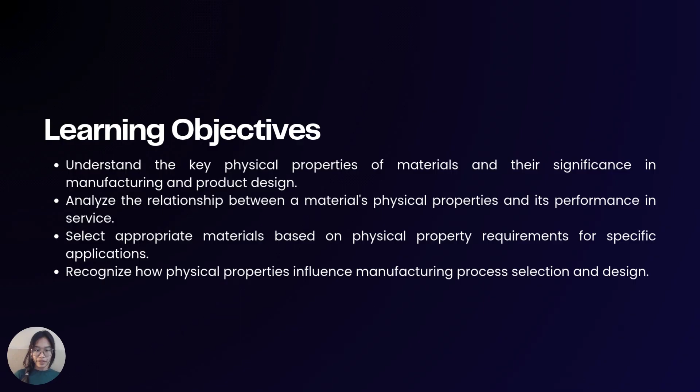To put it simply, mechanical properties answer the question, can it withstand the load? Physical properties answer questions like, will it melt in service? Will it conduct heat away or act as an insulator? Will it expand and jam the mechanism when the temperature changes, or will it rust?

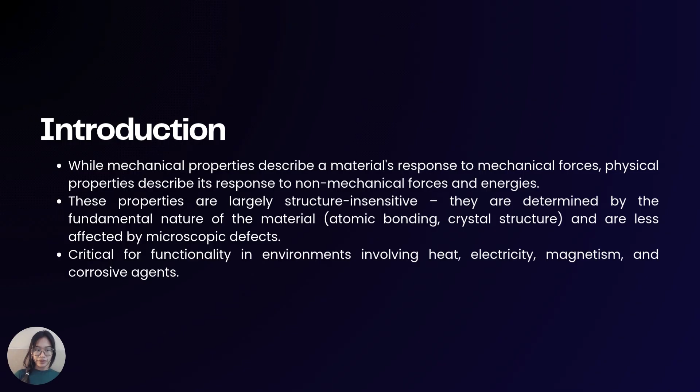A key distinction here is that these properties are largely structure insensitive. This means that while a scratch or a small void can significantly reduce your tensile strength, it has a much smaller effect on properties like melting point or density. These are governed by the fundamental atomic bonds and the crystal structure itself.

Density is one of the most intuitive properties, mass per unit volume. But its implications are profound. It's not just about how heavy something feels, it's a key driver in the lightweighting of structures. In aerospace and automotive engineering, the goal is often to maximize strength and stiffness while minimizing the weight. This is where we use the metrics strength-to-weight ratio and stiffness-to-weight ratio.

A material like aluminum with a density 1/3 that of steel can be a superior choice if it provides sufficient strength for the application, leading to massive fuel savings. Specific gravity is a convenient dimensionless number that allows for a quick comparison against a universal reference, water.

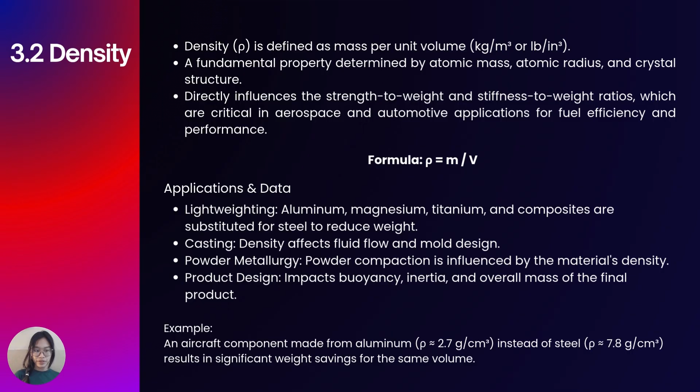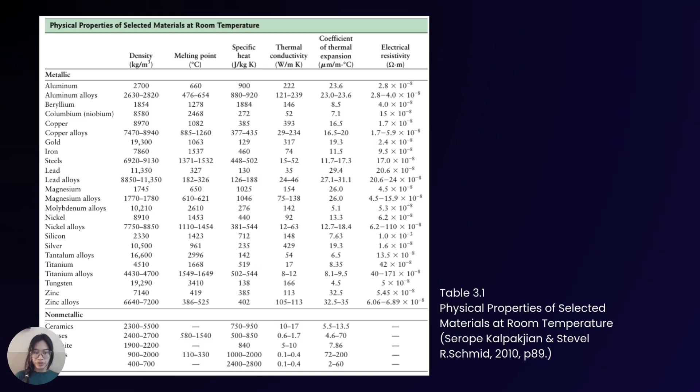And for a consumer product, density directly defines its heft and perceived quality. Think of a premium pen versus a disposable one. The classic example is the substitution of steel with aluminum, composites, or even magnesium in everything from aircraft fuselages to laptop cases.

The melting point is a direct window into the atomic structure. A high melting point indicates very strong atomic bonds, ionic or covalent bonds that require a tremendous amount of energy to break. This is why ceramics like tungsten carbide have such a high melting point. For manufacturing, this is a primary process selector. You cannot cast iron with a wooden mold, and you cannot weld plastics with a low temperature solder.

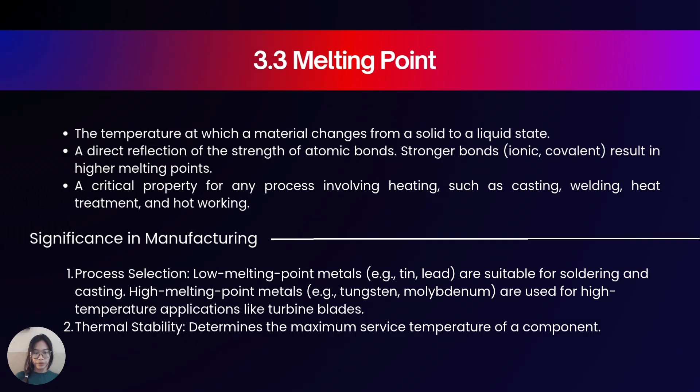The melting point sets the rules of the game for all processes involving liquid metals: casting, welding, and soldering. It also defines the upper service temperature limit for a component. Get too close to the melting point and the material will rapidly lose strength through creep. The melting point gives us a direct look into the atomic heart of a material.

It's the temperature where the thermal energy is so high that it overcomes the forces holding the atoms in their orderly solid form. Think of it this way. Materials with strong covalent or ionic bonds, like the carbon-carbon bonds in diamond, or the aluminum-oxygen bonds in alumina, require a tremendous amount of energy to break. This results in very high melting points.

Materials with metallic bonds or polymers with weak van der Waals forces between their long chains have much lower melting points. These aren't just a number in the textbook. In manufacturing, the melting point is a gatekeeper. It tells you if you can cast a metal, what kind of furnace you need, and what temperature you must reach to weld. In service, it sets an absolute upper limit.

If you try to use a steel turbine blade too close to its melting point, it will soften and fail catastrophically due to creep. The melting point defines the thermal operating window for every material.

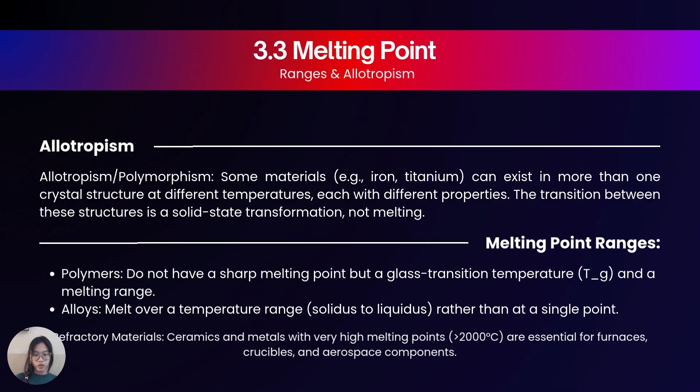Specific heat is the material's thermal inertia. Think of it as the thermal mass. A material with a high specific heat, like water, can absorb a lot of heat energy without its temperature rising very much. This is why water is used in cooling systems.

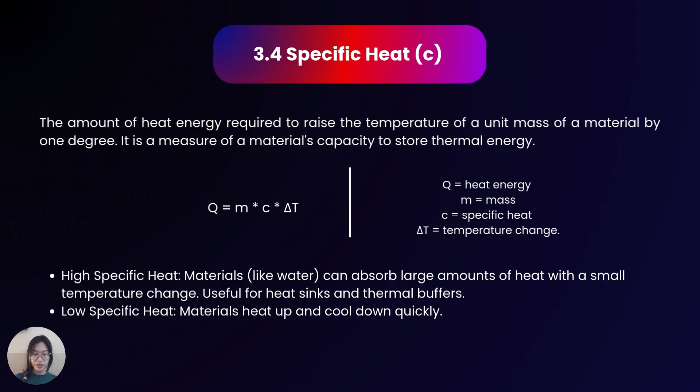The formula, heat energy equals mass times specific heat times temperature change, tells us that the energy required to heat something up is directly proportional to its specific heat. This is a key consideration for energy costs in manufacturing. If you need to heat a large vat of a high specific heat material, it will take a lot more energy and time than a material with a low specific heat.

In casting, the specific heat of the molten metal determines how much heat must be removed for it to solidify. A high specific heat means it will solidify more slowly. In heat treatment, it controls the heating and cooling rates.

In machining, about 98% of the energy used in cutting is converted to heat. The specific heat of the workpiece and the chip determines how much of that heat is carried away with the chip, which is a primary mechanism for cooling the cutting tool. If the heat isn't carried away, it leads to rapid tool wear.

Furthermore, components like brake discs or turbine blades undergo thermal fatigue. Their specific heat influences how much energy is stored in each heating cycle, contributing to stress and potential failure.

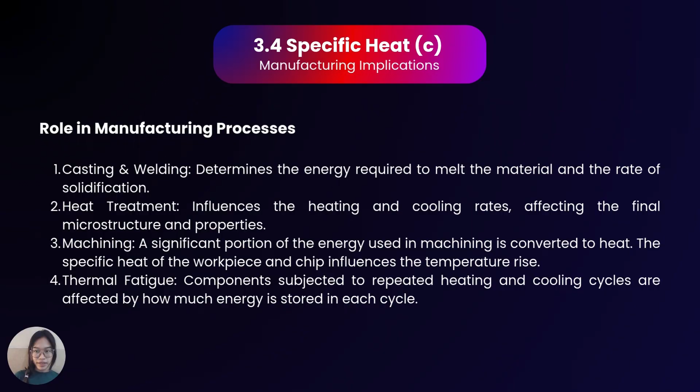Thermal conductivity, K, is all about the rate of heat transfer. It's not about how much energy can be stored, but how quickly that energy can be moved. Metals are good conductors because of their electron cloud, which transports energy rapidly. Insulators like plastics and ceramics lack these free electrons and rely on slow atomic vibration.

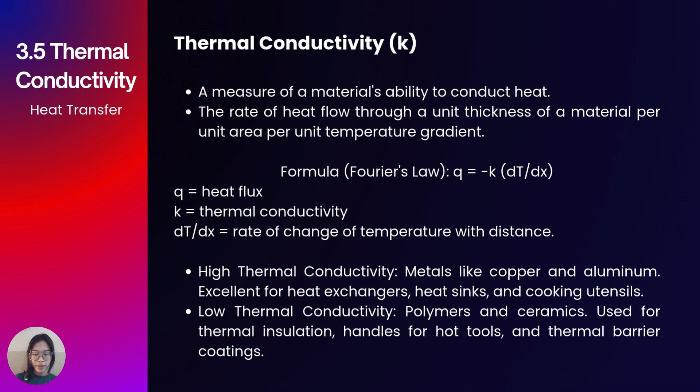The negative sign in Fourier's law is a simple convention to ensure that heat flux, Q, is a positive number, since heat flows from high to low temperature, making the gradient dT/dx negative.

Now, this is where the rubber meets the road. You might think high conductivity is good or low conductivity is bad, but in manufacturing, it's never that simple. Thermal conductivity is a double-edged sword, and whether it's an asset or a liability depends entirely on the process you're using. Let's break it down in 3 areas.

First, let's talk about machining. In this process, you have a cutting tool trying to shear off a tiny piece of metal, and this generates an immense amount of heat concentrated on the very edge of your tool. If that heat isn't removed, the tool softens, wears out, and fails fast.

Scenario A, you're machining aluminum, which is a great conductor. This is a good situation. The heat generated at the cutting tip doesn't just stay there. It does 2 things. It gets carried away by the chip, which acts like a tiny disposable heat sink, and it gets conducted back into the main body of the workpiece. This natural heat dissipation keeps the tool's cutting edge relatively cool, allowing it to last for a long time.

Scenario B, you're machining titanium, a poor conductor. This is a challenge. Titanium acts like a thermal barrier. The heat from cutting can't escape into the workpiece. It gets trapped right at the tool-workpiece interface. This creates a tiny, incredibly hot zone that literally cooks the cutting tool, leading to rapid wear and failure. This is why machining titanium requires special strategies, like high-pressure coolant to force heat out.

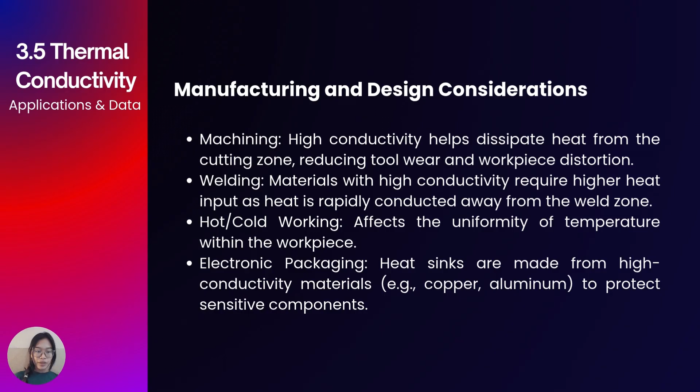So the takeaway is, there is no good or bad thermal conductivity. There is only appropriate for the process. As a manufacturing engineer, you don't just accept this property, but you design your process, your tooling, and your parameters around it.

This is one of the most critical properties for dimensional stability. All materials expand when heated because the atoms vibrate more and push each other slightly farther apart. The coefficient of thermal expansion quantifies this. It's crucial to remember that this is a material property. Generally, materials with strong, stiff bonds, high melting points, and high modulus of elasticity have a lower coefficient of thermal expansion, as their atoms are more resistant to being pushed apart.

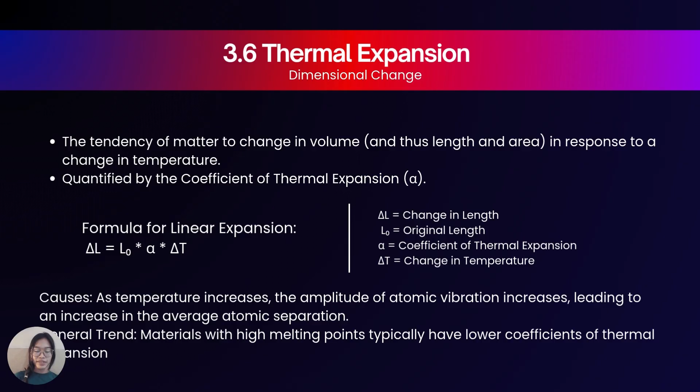Failure to account for thermal expansion can be catastrophic. If expansion is constrained, it generates immense thermal stress that can bend, crack, or shatter components. In precision engineering, like a watch or microscope, even tiny unaccounted-for expansions ruin accuracy.

When assembling parts, you must match the values. A steel piston in an aluminum engine block is a classic example. The aluminum expands almost twice as much as the steel, which must be carefully accounted for in the design of piston clearance. Bimetallic strips exploit this difference to act as thermostats.

And the ultimate example is Invar, an iron-nickel alloy with a coefficient of thermal expansion so low it's used in applications where dimensions must not change, like precision instruments and the frame of the James Webb Space Telescope, which must remain stable in the extreme cold of space.

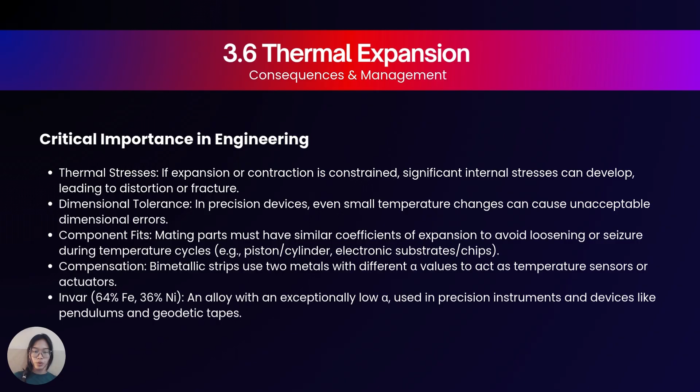So far, we focused on how materials respond to mechanical forces and heat. Now we enter a new domain, how they interact with the fundamental forces of electricity, magnetism, and light. This is what enables virtually all modern technology, from the smartphone in your pocket to the power grid that charges it. Let's start with electrical resistivity.

Think of this as the material's inherent opposition to the flow of electrical current. It's the inverse of conductivity. Why do materials have such different resistivities? It all comes down to the availability of free or mobile electrons. Conductors, primarily metals like copper or silver, have a sea of these free electrons that can move easily when a voltage is applied. They have very low resistivity.

Insulators, like ceramics, for example alumina, and most plastics, have their electrons tightly bound to their atoms. They have very high resistivity. They often block current flow. And then there are semiconductors, like silicon and germanium. This is where the magic of modern electronics happens. Their resistivity is in between, but its most important feature is that it can be precisely and dramatically controlled, tuned, by adding tiny amounts of impurities, a process called doping.

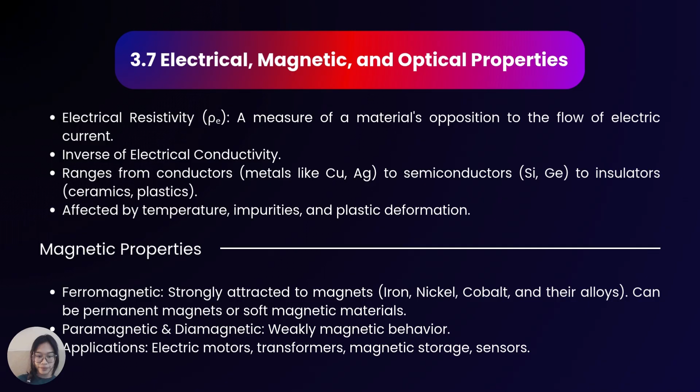So in summary, electrical resistivity gives us control over electrons to process information, while magnetic properties allow us to convert between electrical energy and mechanical motion or to store information. Now, we'll see how materials manipulate the third key player, which is light. Optical properties determine how a material interacts with light. Transparency is not just for windows. Optical fibers, which are the backbone of the internet, rely on ultra-pure glass that is transparent to light signals over long distances.

The reflectivity of a material is key for mirrors, lighting fixtures, and even the aesthetic finish on a product. The choice between transparent, translucent, and opaque materials is a fundamental design decision affecting safety, aesthetics, and function, from the polycarbonate lens of safety goggles to the opaque housing of a power tool.

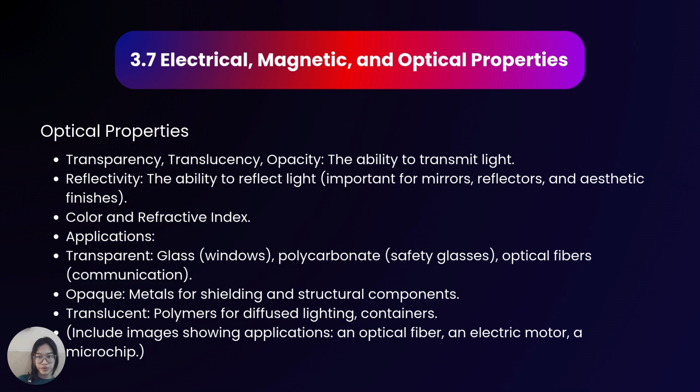Moving on, we have 3.8, which is about corrosion resistance. Corrosion is the silent, expensive enemy. It's an electrochemical process, essentially a battery on the surface of your material. It requires 4 elements: an anode, where metal is lost; a cathode, where a reaction like reduction occurs; an electrolyte, a conductive liquid, even a thin film of water; and a metallic path connecting them.

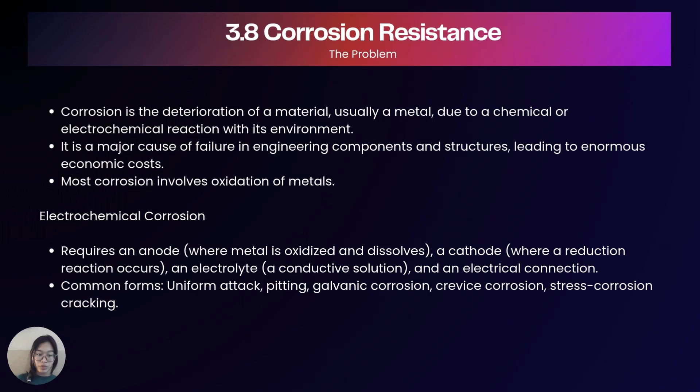The most common form is the oxidation of metals back to their more stable ore-like state. Galvanic corrosion is a particularly aggressive form that occurs when 2 dissimilar metals are in contact in an electrolyte. The less noble metal, the anode, corrodes rapidly. Moving from understanding corrosion to preventing it is a critical design and manufacturing function. The strategies we employ form a multi-layered defense against this electrochemical attack.

The first and most fundamental line of defense is material selection. The goal is to choose a material that is inherently stable. The best examples are stainless steel and aluminum. These metals don't just resist corrosion, they actively fight it by forming a microscopic, tightly adhered oxide layer, chromium oxide for stainless steel, aluminum oxide for aluminum. This passive layer acts as a protective shield, preventing further environmental attack.

When the base metal isn't sufficiently resistant, we apply coatings. The principle is simple. Create a physical barrier. This can be a paint or polymer coating, or galvanizing, which is coating steel in layers of zinc. For larger critical infrastructures, we use active protection, which is cathodic protection. This is where we directly use the principle of galvanic series to our advantage. There are two main methods. The first, sacrificial anodes, where we deliberately attach a block of a more anodic metal, like magnesium or zinc, to the structure we want to protect.

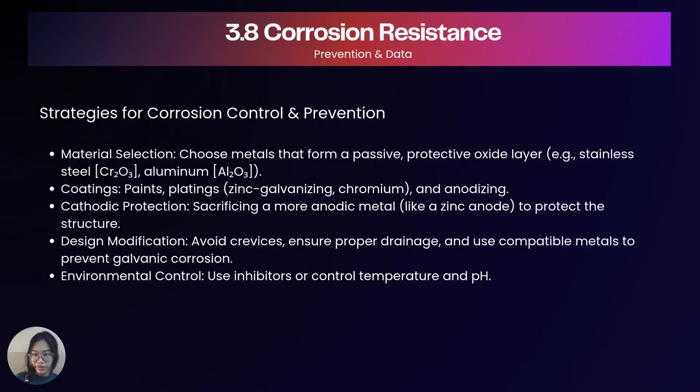Now, if you're looking closely at Chapter 3, its core theme is understanding material properties and how they dictate selection for a specific application. There's no better example of this than something we all interact with on a daily basis: coins. A coin is a perfect case study where subjective human factors and rigorous engineering properties collide. Let's break down the 5 criteria for coin selection through the lens of our chapter's principle.

First, we start with subjective and human factors. So, we start with the human element. A coin needs to feel valuable and trustworthy. Its weight, density, its ring, acoustic properties, and its cool, smooth feel, thermal conductivity, and hardness all create that perception of quality. But that beautiful, valuable feel is meaningless if the coin doesn't last.

This brings us to our second critical criterion, which is durability. A coin that tarnishes or wears smooth in a few years is a failure. So the very property that makes it feel good, like its hard polished surface, must be matched by its core material properties, wear and corrosion resistance. This ensures the design remains legible and the luster lasts for decades, preserving that initial feel throughout its lifespan.

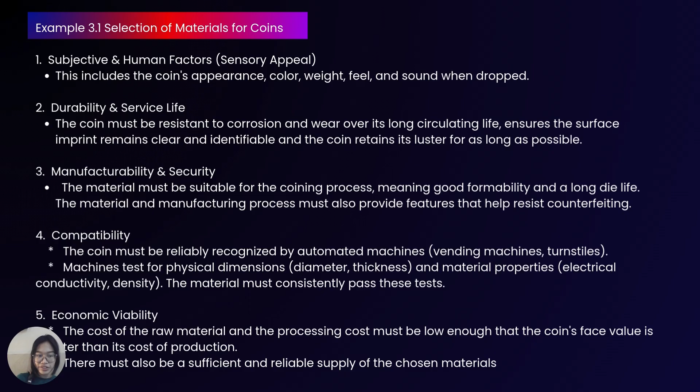So, to bring it all together, the humble coin is a masterpiece of balanced engineering. Its selection isn't about finding one perfect property, but about optimizing a portfolio of properties, from the subjective feel to the hard economics of cost and supply. It's a tangible, everyday example of the core principle from Chapter 3. Successful material selection is a multidisciplinary compromise, where science, engineering, human factors, and economics all have to align to create a successful and enduring product.